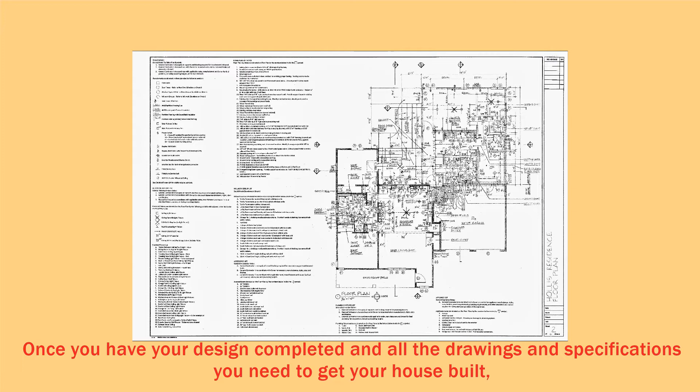Once you have your design completed and all the drawings and specifications you need to get your house built, you'll need to start the process of getting the house constructed. The traditional method of this is to utilize the design bid build process, where the design and contract documents are complete and you request several general contractors to provide bids. You'll then need to submit information to your local jurisdiction to get approval to build. These will be the focus of this video.

The first thing you'll need to do is decide on which contractors you'll want to bid on the project. You'll likely have done some preliminary research on contractors in your area prior to this point to get familiar with their work. An important part of deciding who all you want to bid the project, called the shortlist, is to meet with each potential candidate. Discuss their process, visit some of their representative projects, and contact their references. The project visits are important to see the quality of construction each contractor can provide.

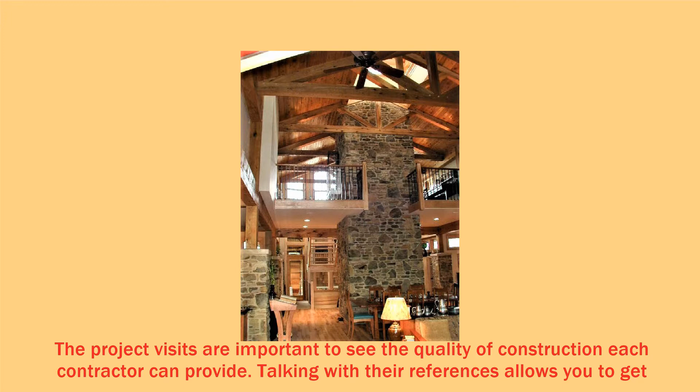Talking with their references allows you to get a sense of how their relationships with owners worked, finding out any problems that occurred, and how those issues were resolved. Also, what the day-to-day attitude and responsiveness of the contractor was.

Once you have the short list, you'll need to bid the project. The bidding process involves packaging your drawings, specifications, and bidding requirements to be delivered to each contractor on your short list. Bidding requirements outline your information, the project information, the cost the contractor is to provide in his bid, the delivery method of the bid, the date the bid is due, and when you'll decide on the contractor. You'll also list out the drawings and specifications included as part of the package.

Prior to issuing these documents to the bidder, the bidding requirements should be reviewed with your legal representative, any lending agency for the project, and your insurance representatives. They'll need input to address any legal, financial, bonding, and insurance requirements that will be needed for the contractor for the project.

The bidding period will usually be several weeks, usually 3 to 4, so that the contractors can review the documents. They'll determine the material quantities for the project, decide on the subcontractors they want to use, and then put together the bid package.

To get their bid numbers, the general contractor will talk with several subcontractors for each part of the work being subcontracted, selecting the subs that'll give them the best price and quality of work for your project. The contractor and subcontractors will also talk with numerous suppliers to establish the cost of the materials they'll need to purchase and have delivered for the job.

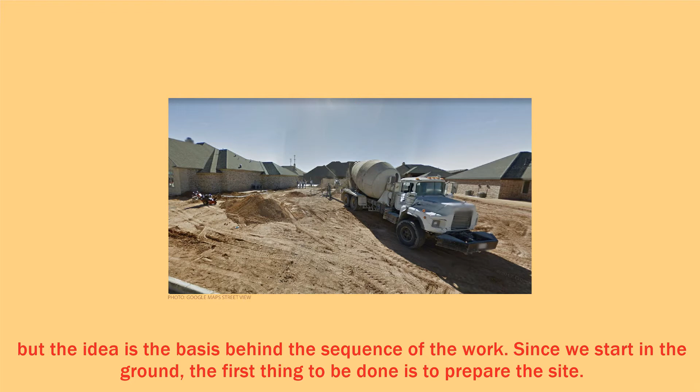Since we start in the ground, the first thing to be done is to prepare the site. This involves removing any existing structures, vegetation, or boulders, and then moving a lot of dirt around to create a level area to build the house.

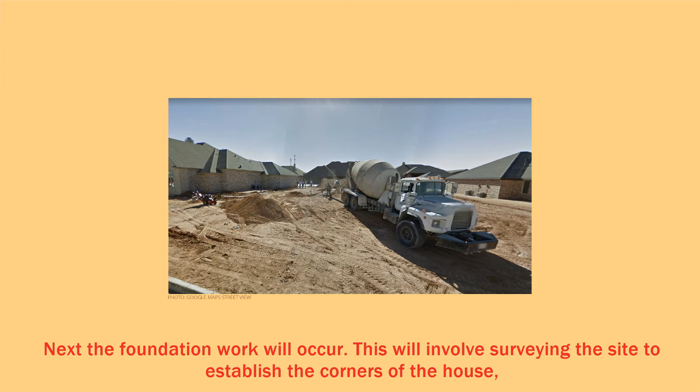Next, the foundation work will occur. This will involve surveying the site to establish the corners of the house, then establishing guides that are used to dig out trenches or holes in which the foundations and basement structures can be built.

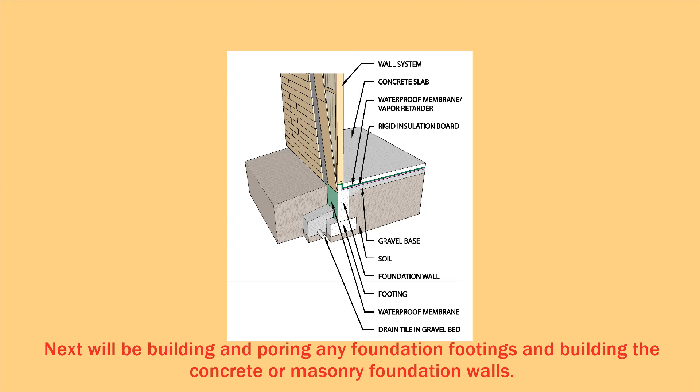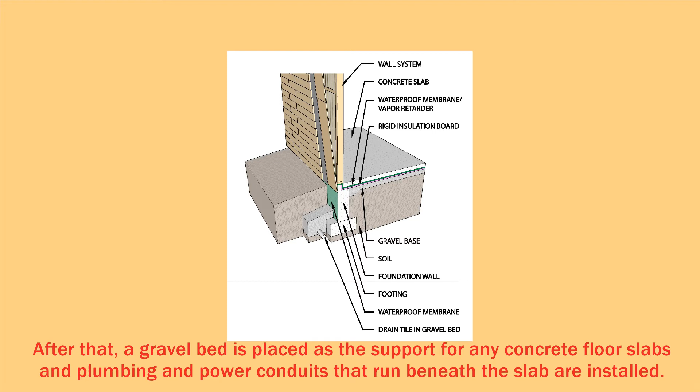Next, we'll be building and pouring any foundation footings and building the concrete or masonry foundation walls. After that, a gravel bed is placed as the support for any concrete floor slabs, and plumbing and power conduits that run beneath the slab are installed. Water and vapor membranes required beneath the slab are placed, the slab reinforcement is set, and then the concrete slab is poured.

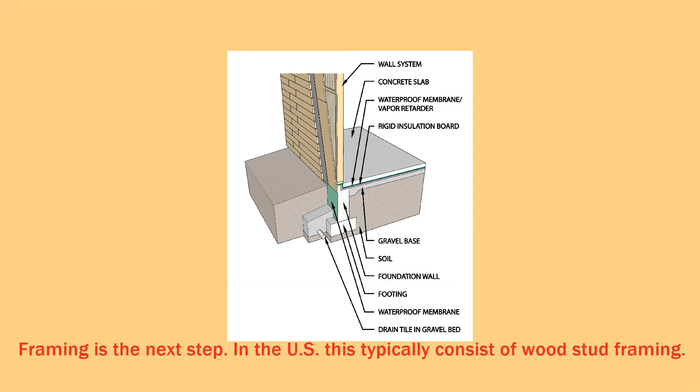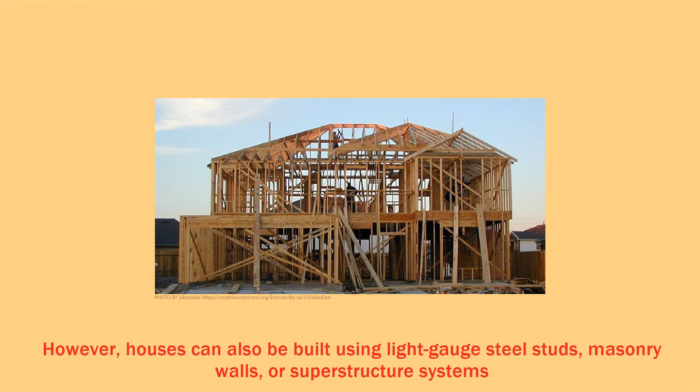Framing is the next step. In the U.S., this typically consists of wood stud framing. However, houses can also be built using light gauge steel studs, masonry walls, or superstructure systems built of structural steel or concrete columns. Structural framing or structural slabs for upper floors and roofs are part of the superstructure systems.

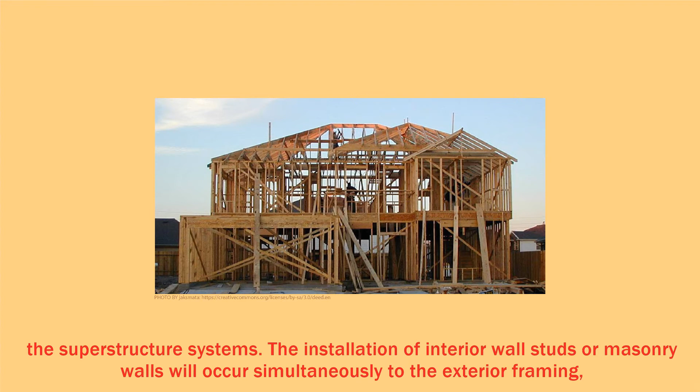The installation of interior wall studs or masonry walls will occur simultaneously to the exterior framing, but typically follows the erection of a superstructure.

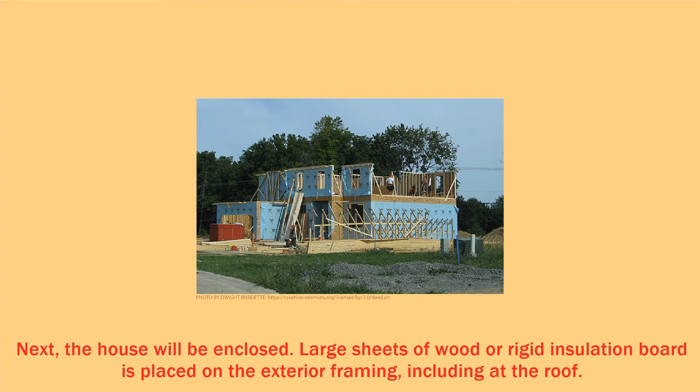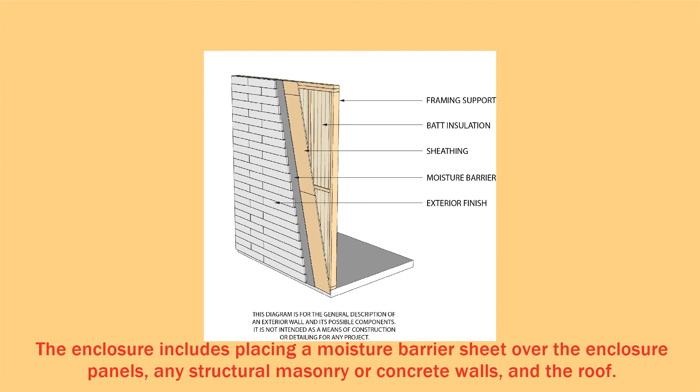Next, the house will be enclosed. Large sheets of wood or rigid insulation board is placed on the exterior framing, including at the roof. Superstructure systems require the installation of infill framing on which these panels will be installed. The enclosure includes placing a moisture barrier sheet over the enclosure panels, any structural masonry or concrete walls, and the roof. The windows and temporary exterior doors will be installed to complete the enclosure.

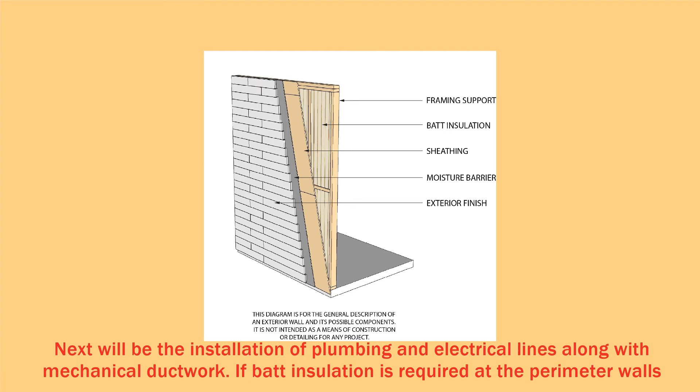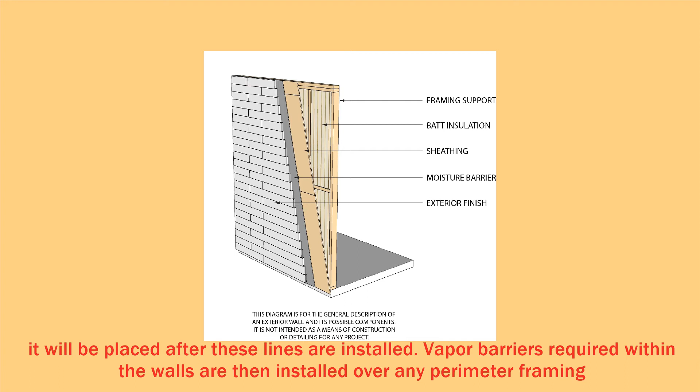Next will be the installation of plumbing and electrical lines along with mechanical ductwork. If batt insulation is required at the perimeter walls, it will be placed after these lines are installed. Vapor barriers required within the walls are then installed over any perimeter framing prior to installation of any gypsum board wall panels or plaster wall systems.

Next will be a combination of exterior and interior work. Exterior work involves the installation of finished materials such as siding, brick, or stucco on walls, and shingles or tiles on the roof. Exterior trim at windows, doors, and roof eaves will also be installed. Service lines between the house and the utility services will be placed and connected. The installation of any septic systems, irrigation systems, and exterior lighting will also occur.

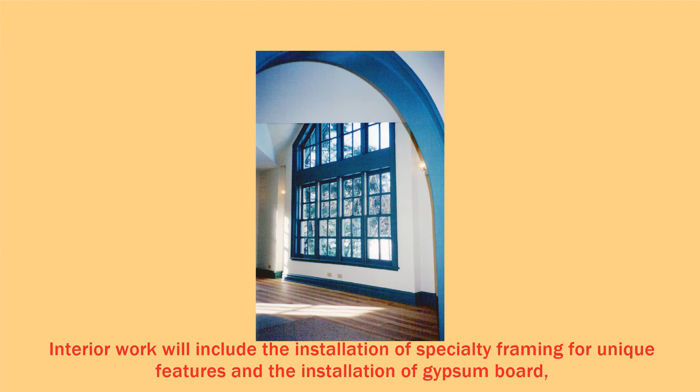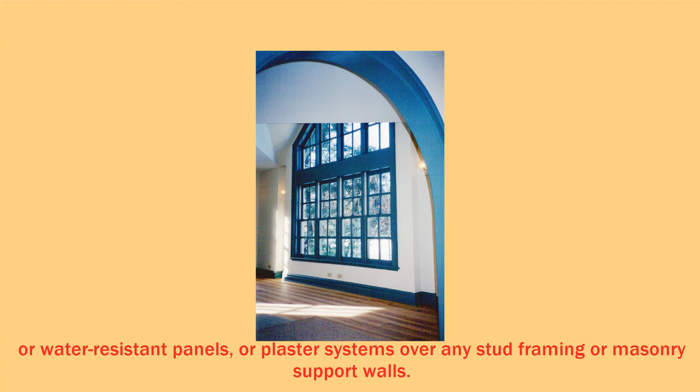Interior work will include the installation of specialty framing for unique features and the installation of gypsum board or water-resistant panels or plaster systems over any stud framing or masonry support walls. Primary plumbing fixtures such as showers and tubs will be placed on the slabs or subfloors. The installation of hard floor finishes such as wood, tile, or stone are also installed.

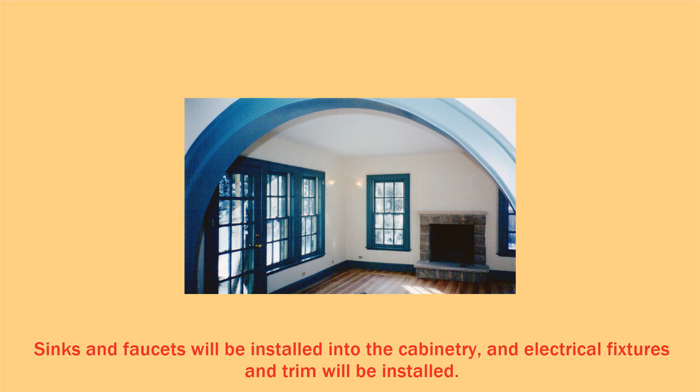Toilets and any cabinetry in the house will then be placed. Sinks and faucets will be installed into the cabinetry, and electrical fixtures and trim will be installed. The electrical, mechanical, and plumbing systems will then be activated and tested, and interior finishes such as painting and wall covering will be installed.

Site work will include moving dirt around again to obtain the final slopes needed for site drainage. Driveways, porches, patios, and walking paths will be created, and the site will be cleared of any remaining construction debris and equipment. The final elements will be installation of soft elements such as carpeting and drapery inside, along with exterior landscaping.

Throughout all of this will be various inspections of the foundation, framing, electrical, plumbing, and mechanical systems by the local jurisdiction. Once all inspections have occurred and any issues addressed, the authority will issue a certificate of occupancy for the residence, after which you can move into your new home.

At this point, the contractor will create what is called a punch list, which identifies any small items that remain to be addressed and completed, which you'll then review during a walkthrough of the house. The contractor will then have a limited time to address these issues, and will compile all warranty information and operation guides to be provided to you. Confirmation of completion of the punch list will occur, and all final paperwork and payments will be completed to close out the project.

There are numerous variations to the contractor selection and bidding process, and the construction sequence specifics can vary a bit, depending on the house design, components, and the contractor.